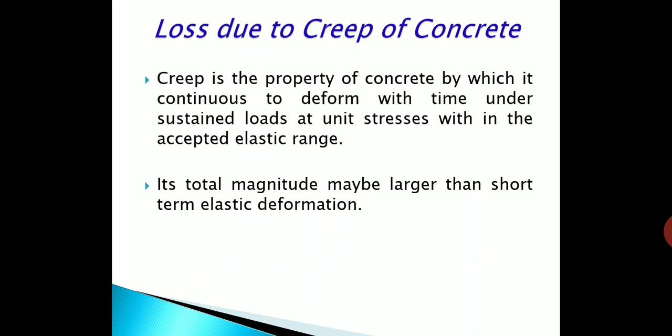The total magnitude of the loss of pre-stress due to creep may be even larger than that due to the elastic deformation. Hence, the creep factor has to be considered and given due weightage while calculating the losses in pre-stress. The strain due to creep varies with the magnitude of stress. It is time dependent. Creep of concrete results in loss in steel stress.

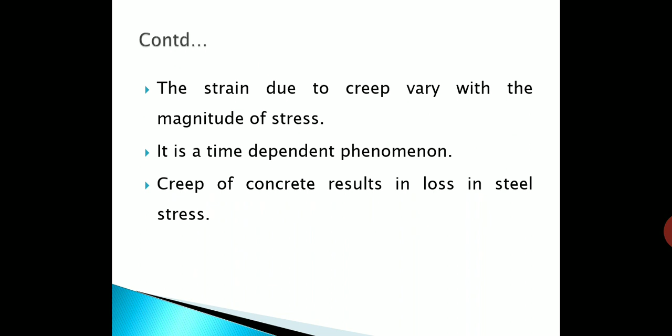So the loss can be calculated by using two methods. One is the ultimate creep strain method, in which we find the losses by using the relation epsilon Cs into Es into Fc, where epsilon Cs is the ultimate creep strain, Es is the modulus of elasticity of steel, and Fc is the pre-stressing force in concrete at the level of steel.

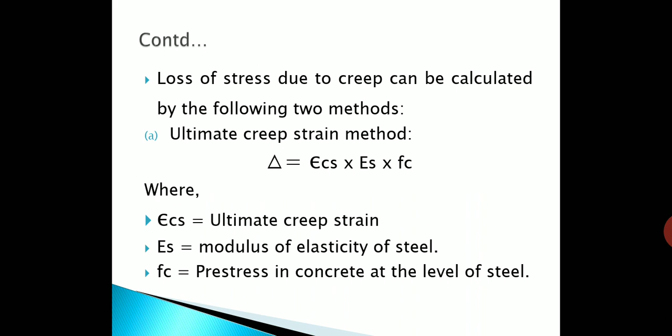Or even we can use the creep coefficient method, in which the total loss is given by phi into m into Fc, where phi is the creep coefficient which varies between 1.5 to 4. It depends on various conditions such as the temperature, humidity, etc. It is given in IS 1343 1980 code book, page number 17. So you can either apply the previous method or creep coefficient method depending on what is asked and what is the given data. There will be a bit of variation in between both the answers.

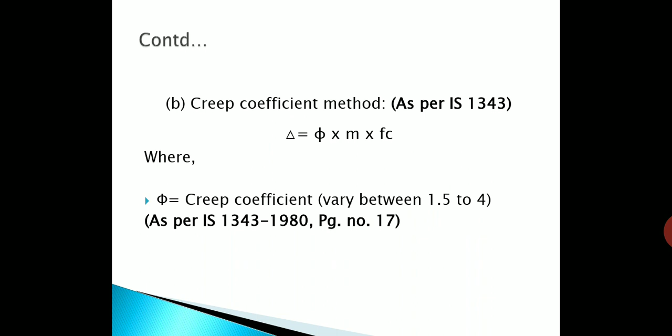So moving further, next loss is the friction loss. So we have studied what is friction, and always friction force is the one which is an opposing force. So here also, in case of pre-stress concrete, because of friction we tend to lose the applied pre-stressing force. This type of loss occurs only in post-tensioned members. In pre-tensioned members, this type of loss does not occur.

Now here the loss can take place at 2 points. The first is the loss in the jacking equipment, the equipment which you are using to transfer pre-stress. In that the friction loss can take place, but it is having a very small magnitude. So generally we can neglect it. But the loss which happens because of the friction of the tendons with the surrounding material is a considerable one.

So it happens in two types. One is over a straight length where the tendons tend to wobble, that is, say, a vertical movement type. Second is at the curvatures where the friction is caused due to the curvature as well as the wobble effect. So when we are placing the tendons and they start acting as per their shape, once they come into contact with the neighboring surfaces, they tend to undergo friction, which produces the frictional losses in post-tension members.

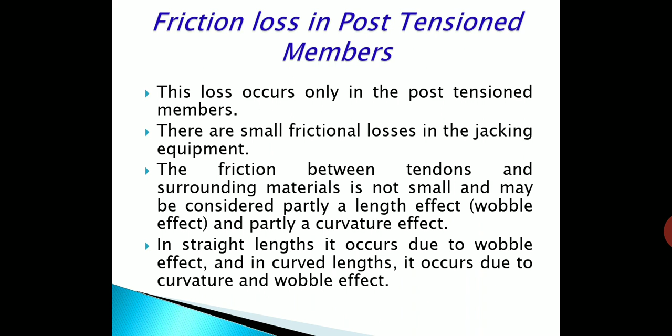The loss is given by the relation Px is equal to P naught into e raised to minus (mu alpha plus Kx), where Px is the pre-stressing force at a section which is at a length x from the end considered. P naught is the pre-stressing force applied at the jacking end, or we can say the initial pre-stressing force. Mu is the coefficient of friction between the cable and the surrounding material, that is the duct, which varies between 0.25 and 0.55. Alpha is the cumulative angle in radians.

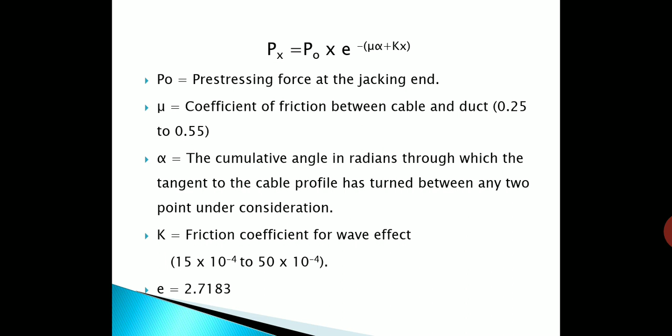It depends on the profile of the cable. K is the coefficient of friction for wave effect, that is the wobbling effect. E value is taken as 2.7183. Okay, so substituting the values, we can get the loss in pre-stress at particular section X.

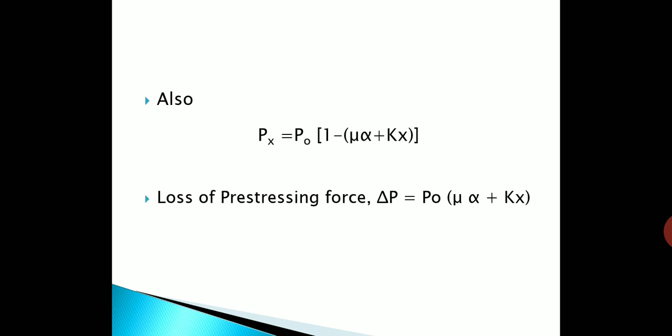Further, if the values are very low or very small values of the curvature and all, we can directly apply the formula Px is equal to P naught into bracket 1 minus bracket mu alpha plus K into X, where if we expand the bracket, one term becomes P naught into 1 is P naught, other term is P naught into bracket mu alpha plus Kx, that is the loss in pre-stressing force which is occurring because of friction. So frictional losses are very important, and the initial loss because of jacking effect and all can be avoided by taking necessary precautions on the site.

Next, loss due to anchorage slip. This is the basic loss which happens while transferring the pre-stressing force from the jacking equipment to the tendons. During the release of the force, during the transfer stage, the wires slip over a small length or small distance before they are finally placed in the exact position. So because of this, a loss happens which is termed as loss due to anchorage slip.

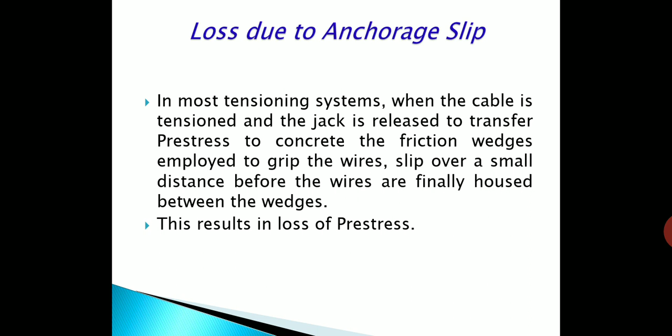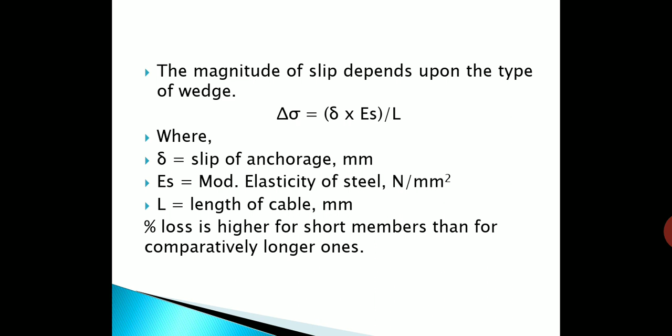This is a loss which is most common and is bound to happen, but still we can reduce the amount of loss by taking necessary precautions during execution. The magnitude of this loss is given by the relation delta is equal to slip of anchorage multiplied by modulus of elasticity of steel divided by the length of the cable. So percentage of this type of loss is higher when the length of the member is shorter, whereas this loss is considerably lower for high span members.

So with this we complete the discussion of different types of losses or different causes which cause the loss of pre-stress in PSC members. So let's discuss one simple example for accounting loss due to creep. In the given example, we have a section of size 100 by 300, pre-stressed by 5 wires of 7 mm diameter located at an eccentricity of 50 mm.

So e is given as 50. The beam is of the size 100 by 300. There are 5 wires of 7 mm diameter. The initial pre-stress in wires is given as 1200 Newton per mm square. We have to find the losses in stress due to creep of concrete by using both the methods which we have discussed earlier today. So let's take down the given data, that is modulus of elasticity of steel and concrete. If not given, it has to be taken suitably.

Let's calculate I, which is BD cube by 12. Then area is 300 into 100. Then epsilon cc is 41 into 10 raised to minus 6 mm per Newton per mm square. P, let us calculate, because the value is given in the form of stress, which has to be converted to newtons or kilonewtons. Then alpha, the modular ratio, is the ratio of Es by Ec, which we get as 6. The coefficient of creep we are taking as 1.6.

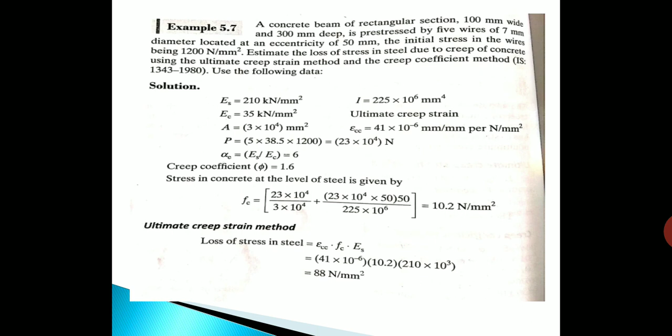Now next, using creep coefficient method, loss is calculated by substituting the values, and we get the loss as 97.92 Newton per mm square. Hence, we find that the loss we got using the creep coefficient method is greater than the loss we got by the other method. So this is just a small example to make you all understand the effect of creep.